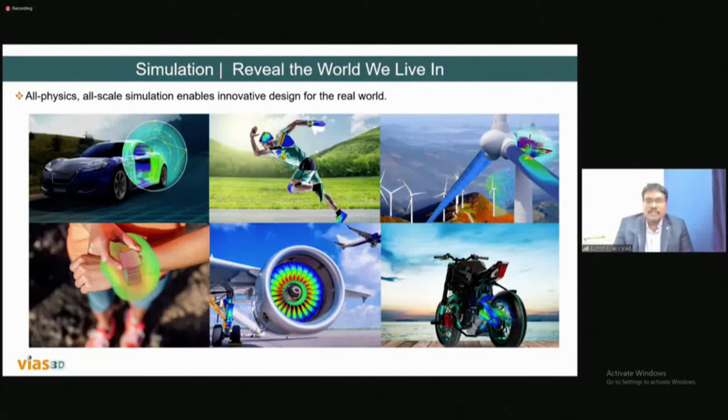When you come to electromagnetics, we will focus on 4 different aspects. One is the basic microwave and optical region, where a lot of players in India are working on antennas, antenna arrays for the base station as well as the receiver part, and also working on fiber material optical transmissions.

And again, as I mentioned before, PCB-based ECU boards are one of the most important things, but they are susceptible to a lot of emissions, radiations, and immunity problems.

That also we had to take care of. Now I can see that the switching networks, actuators, controllers - and you can see that all the industries are moving towards electric vehicles, electric motor design, which is also a complicated thing. But everything can be done by the simulation portfolio, all connected together.

So you get a system and assembly modeling where everything can be connected, and you can understand how the performance is happening. If the antenna is radiating, what fluctuations happen on the cable, because the cable also gets susceptible to external radiation - all that kind of analysis can be done in a single nutshell.

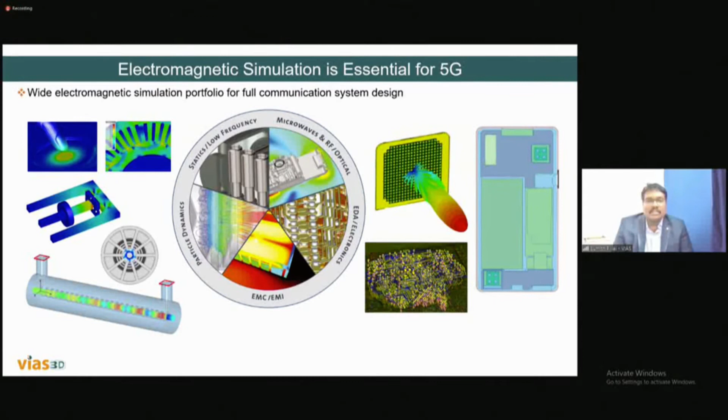Now you see the features about 5G - one of the things is it should have very good latency, and there should not be any delay in the response. You have to send a bulk amount of data that should not be delayed. Like Sir was presenting about virtual events where the singer can be in one place and the background in another place. So one of the things is no latency, the speed of transmission should have no delay, and you should be able to transmit a huge amount of data. So everything is important in terms of 5G.

Now these are the statistics we have seen from the past, forecasted a couple of years back, but now I think it is again improved - 25 billion is now maybe improved to 51. That forecast is already there. We have more than 50,000 technical papers on 5G already released or coming on the way, at least 30,000 already in the market, in different journals and conference papers.

Now one thing which also needs to be discussed is about the frequency bands, like Kiran sir was saying about the different frequency bands he is going to test. We will be interested in the sub-6 gigahertz frequency band as well as the millimeter wave frequency bands. I think, if I remember, SAMEER Chennai already has a test bed for the sub-6 gigahertz 5G test bed.

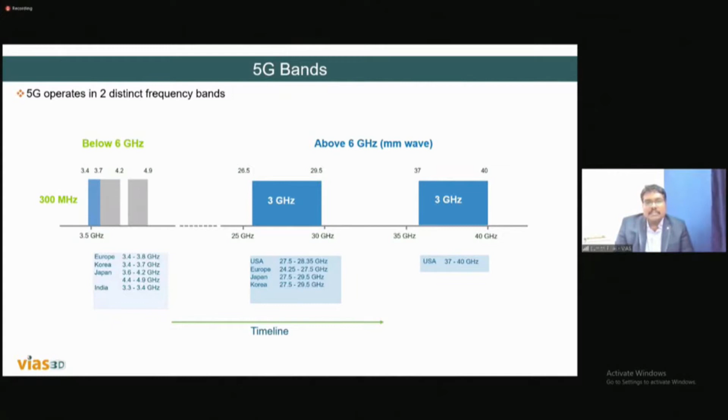So this development is also happening in India, not just for developing communication devices - they are also developing different kinds of test beds in incubators or IIT kind of prestigious organizations and institutions. Now, coming to the different challenges in the industry and how we can solve that.

One of the things is business challenges, obviously. Everybody has to adapt to 5G technology, they have to go hand in hand with the latest technology. Obviously it's not only 5G, any technology that is adopted in the industry very fast - it's very important how much they can adopt the latest technologies.

And how the complexity is varying - obviously 5G is a very complex technique, but as it is growing and more papers are coming, it will become easier to understand. But any technology, just like at the beginning, will be very much complicated.

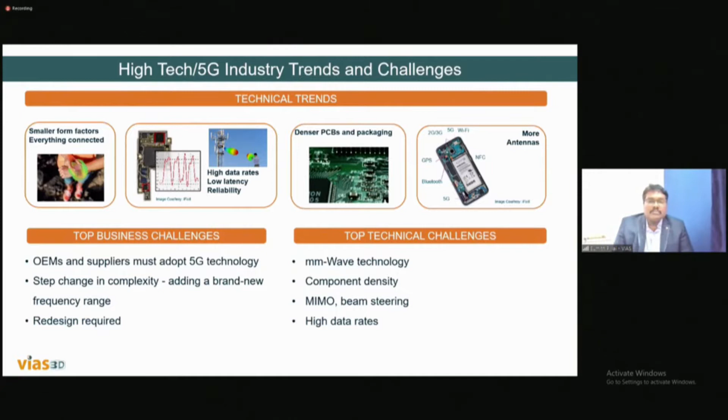Then there's redesign - obviously everything has to be redesigned in terms of the communication network and everything, as well as technical problems, since we are not that familiar with millimeter wave technology. But now it is included in the curriculum in some institutions, so new generation engineers may be much more familiar with millimeter wave technology and complex terms like phase division multiplexing and beam steering and everything.

Now it comes to the development of the product. Now you have to release the product in the market. So as I mentioned before, there has to be compliance. One is any device has to be compliant with the electromagnetic interference and compliant as per the IEC and other norms. And also if you consider the cables, you have to be compliant with the different kinds of CISPR standards.

Now, not only that, if you consider your phone, it is radiating. Your base station antenna, it is radiating. And one of the problems with 5G is the range; it is very difficult to establish very long range communication. So for that, you need to add more transceivers or routers, but that will add more complication, not only in terms of the implementation.

The other thing is how the safety of people can be affected, because generally we calculate the specific absorption rate for the human body for the antenna. Same way for the base station, our performance standard is the ICNIRP standard. So we have to get that compliance as well. So you have to see how much the particular transceivers are going to affect the human body. That is one of the challenges that also has to be seen.

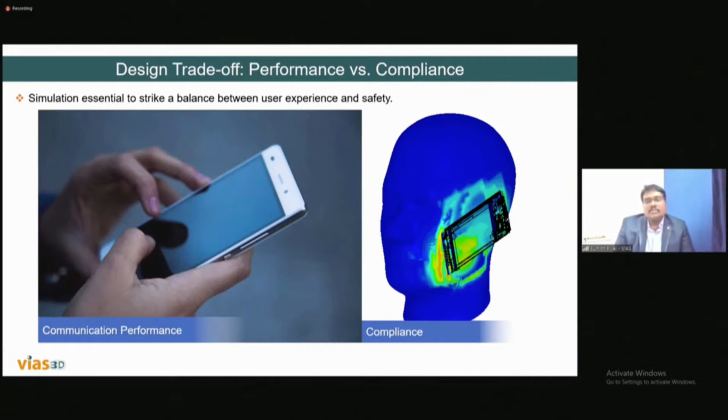So fortunately, simulation methods are also providing you accurate models, phantom models for the testing, because you know that physical testing is not always possible. Earlier, there was even animal testing, but now it is also restricted. Under certain cases, we can test animals as well. So it is a good thing that researchers are implementing phantom models, which are very accurate and very close to human or animal nature. So it will be easy for you to understand whether the device is going to be compliant or not compliant.

So we will be discussing three important industry verticals, and how 5G is going to be very important in those industries. For example, one is high tech, the other one is transportation mobility, and the third one is industrial equipment. For high tech, as I mentioned, most things are coming on the network side. They will be producing consumer electronics, or working on smart appliances, or some may be depending on wireless or wearable antenna networks, and it's also applicable for life science, because that is also one of the important beneficiaries of 5G.

So one important thing for us is how we are going to contribute from the electromagnetic point of view. We are going to help them with the analysis or development of millimeter wave antennas, or how they can integrate those antennas into their particular device, and make sure those antennas will not create a huge amount of radiation or affect other things, because generally any antenna is an intentional radiator, and there will also be an unintentional radiator, such as the cable. These radiations can affect the other ECUs as well, so ECU performance will reduce. So we have to find the best shielding method or best isolation method for this antenna. That is one of the things we work on along with the industries.

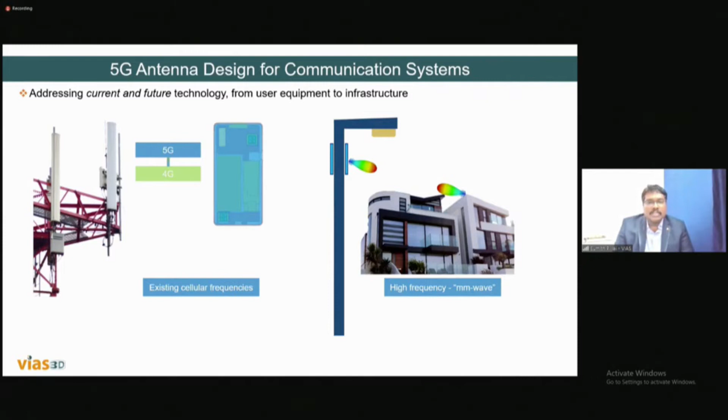So we are not only interested in the antenna design, but also, as I said, in what happens when you place the antenna on a particular device. As I mentioned, it may affect the devices there, so we have to find the best isolation for that particular antenna. The other thing is how that antenna is going to behave in that particular environment. For example, in a mobile phone case, how the radiation pattern is. Obviously, because of platform interference, there will be perturbations. Some perturbations are not acceptable; with some, we can pass the test. So we also have to take care of that.

So it will be different in terms of 5G in sub-6 GHz or in the millimeter wave, because in sub-6 GHz you already know that the density is more and the complication is more, because the element size is also large, and to allocate it within a smaller platform is very difficult. But on the other hand, in millimeter wave the element size is very small. But as I mentioned, we are considering an antenna array, not just one or two antennas.

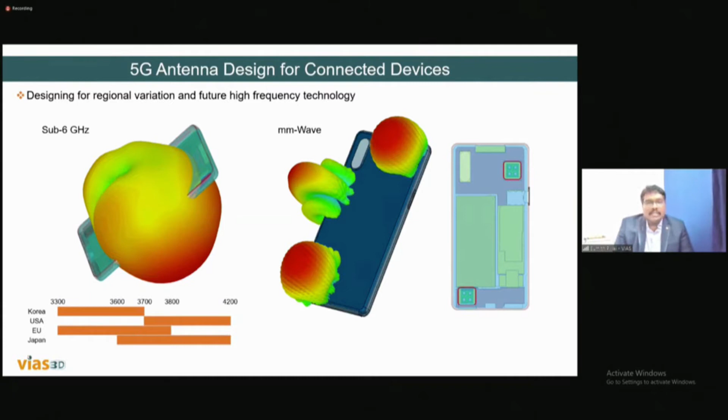When you are considering the MIMO architecture, the other thing is how you are going to place those elements on the particular platform. Obviously it will be very short in size. But the range, that is our concern, so that has to be improved.

The other part, as I already mentioned, is ECU development. ECU development is another key problem. So we need to smartly design the ECUs used for this 5G network. At the PCB level, we have to make it perfect so that it will not create much problem in the future. For example, whether the layout is going to work, or whether the traces have more cross coupling, all these things we have to test.

So signal integrity and power integrity analysis is one of the key analyses happening in the high-tech industries or 5G industries, to avoid further complications after fabrication or testing. So these kinds of methods we are also trying.

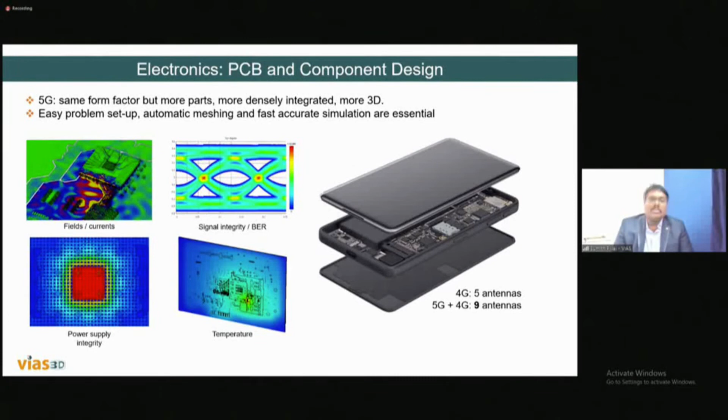And the other thing is temperature sensitivity, because all the integrated circuits we design are temperature sensitive. We have to find out how much heat is created by this particular PCB, and avoid the integrated circuit heating up other devices and causing a problem. So we have to find the solution and provide corresponding shielding or cooling mechanisms for that. And finally, after the PCB design, we go to physical testing.

But before the physical testing, we can do the same testing in the virtual platform as well. Not every software solution supports it; EMC is not that easily implementable in every software solution, but most commercial software is trying to adopt that kind of method. So now you can even go for EMC testing like radiated emission, conducted emission, or susceptibility tests. These are very important.

In 5G as well, there will be dedicated testing standards, and you have to test against them. Physical testing is always cost and time consuming, so you have to avoid multiple tests. So one of the best choices is to do the virtual testing and understand the possible chances of failure. Once you figure that out, you can make the solution in the software domain itself, and then go for the physical testing. Generally, you can reduce it to two or three tests. Sometimes you may pass in the first test, depending on the standard.

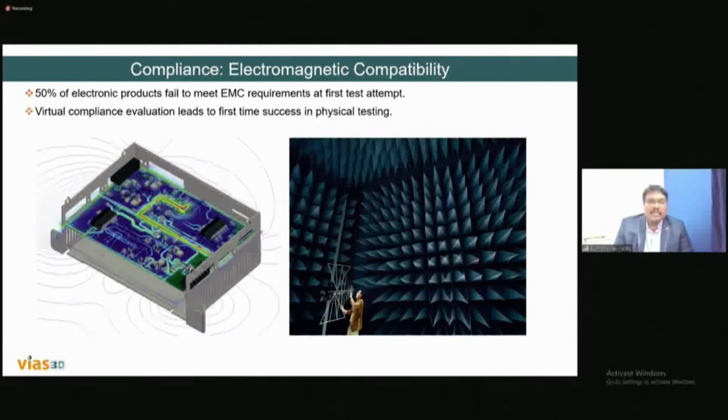After testing, once you say your device is capable of withstanding any kind of fluctuations and will work in the real environment, the other problem is how the base station and tower are to be implemented, because implementing the tower is more expensive than manufacturing the antenna, right? So you have to be very careful. That is where virtual platforms like software simulations help. You can virtually place the antennas on tower structures, and provide electrical tilt and mechanical tilt as per convenience.

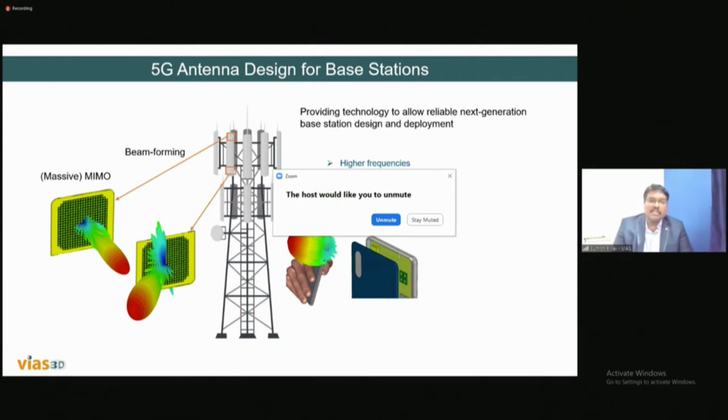You can check that. You can place one or two antennas or antenna arrays, then see the possible coverage. You can complete the propagation mapping and finalize that for this tower I need this antenna in this direction with this electrical and this mechanical tilt. That is going to save a lot of time when you go for the actual implementation.

And one more thing, you have to go for compliance as well. You have to test this particular base station antenna by placing a human phantom.

Okay, how much is that base station going to influence the human body, or how much radiation is going to be absorbed by the human body. In this regard, the SAR standards are very much important, and for millimeter wave those standards will definitely need to be there, because the penetration will be less, but the power flow will have to be seen. So we also tested similar kinds of cases, and we have seen that the penetration is very less, but the power flow is actually happening throughout the body.

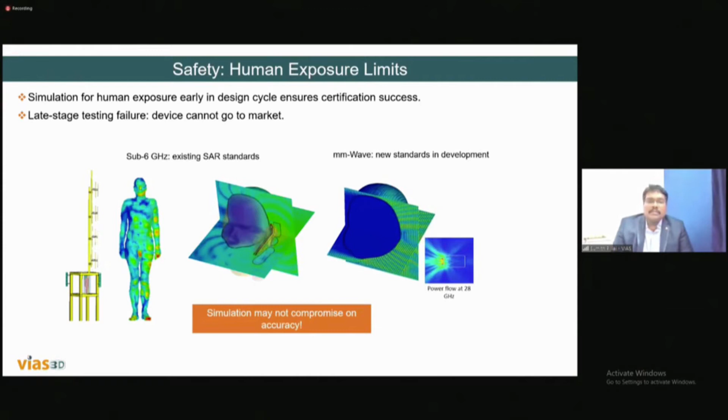So that is also one of the things, and the new standards. So we are waiting for the new standards as well from the industry verticals, which they didn't provide yet, but very soon I hope the new standards are going to be in place, and we're going to test it.

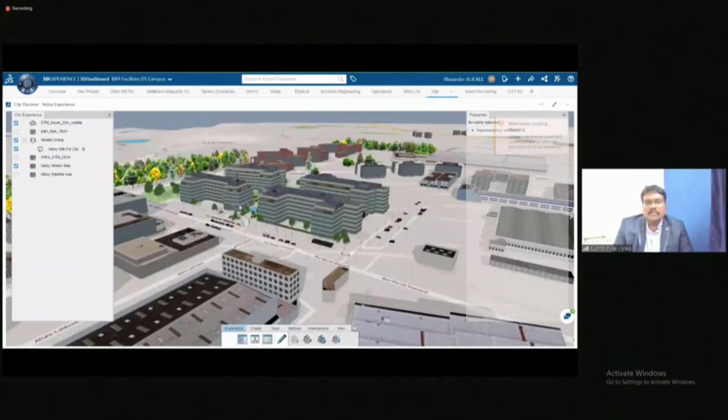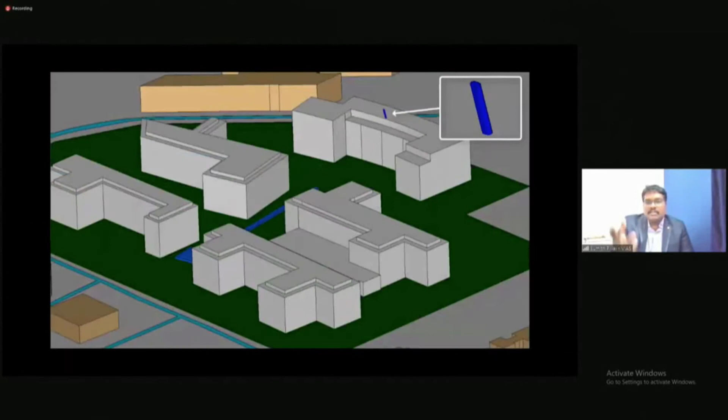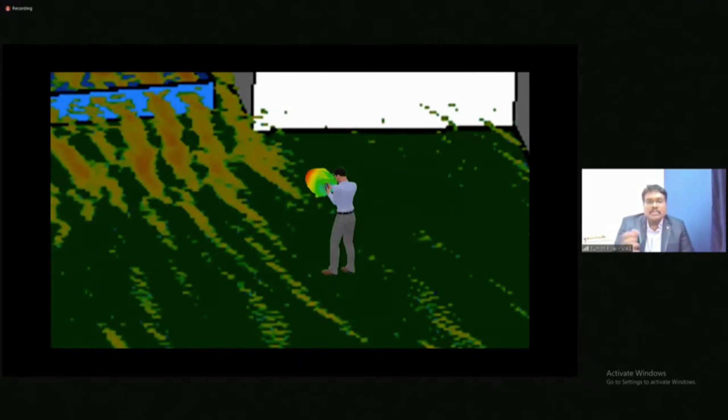And this is an example of what we generally do for the industries, basically for propagation model mapping, etc. So we have our 3D Experience platform where we can construct entire smart city kinds of structures. And you can place your base station on the location, just like you can see the base station is placed over there. When that radiation is happening, you can see how that radiation is actually spreading across that particular area. And suppose your person is over there with a mobile phone, depending on the mobile phone sensitivity, antenna sensitivity, how much you can receive from that particular base station.

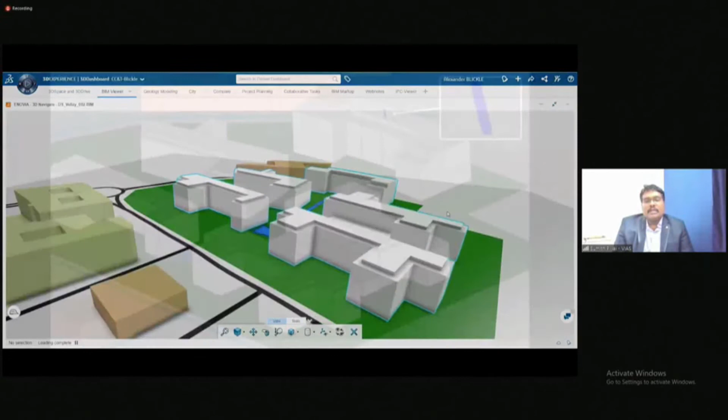So there are a lot of challenges. Obviously the multipath propagation is one of the things. The vegetation is also going to contribute. What is missing is obviously the atmospheric effect, but we can include it ourselves as losses. Definitely the 3GPP standard equations will be in place, so we can add those equations as well. We can make it more finalized as per the 3GPP standard.

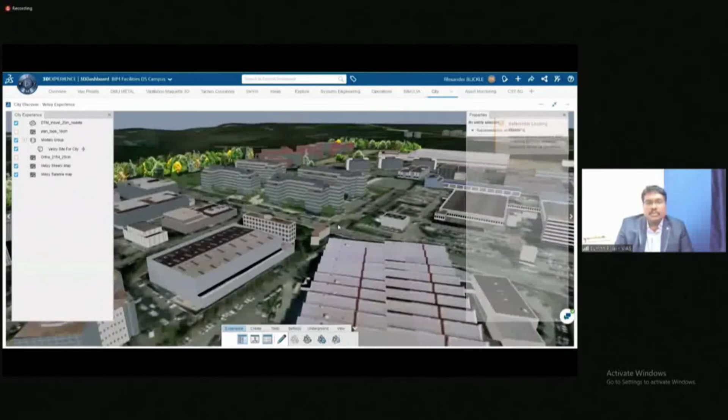Basically, this is one of the important projects we do nowadays, because most of the industries are interested to see how their base station is going to work, how efficiently it can propagate over the media. The other thing is we also do some analysis for reliability and resilience as well. For example, the building, you have a base station antenna.

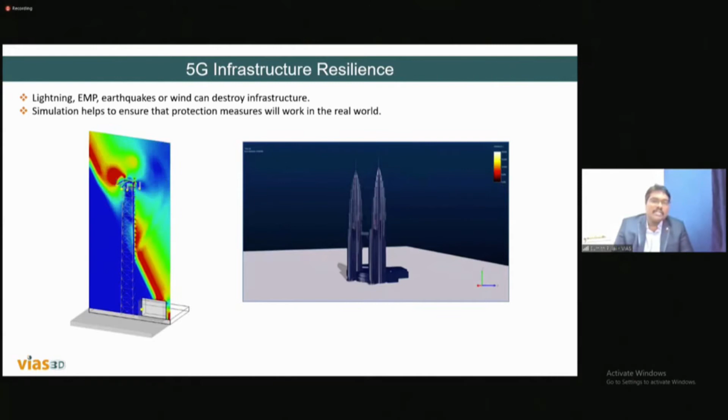If a thunder strike or lightning strike is happening, how much is it going to affect it, the entire metallic structure is going to resonate according to that frequency. So it will also create a huge amount of current flow. It can damage the 5G system. So we have to see what the possible effect is. We have to provide the appropriate lightning arresters for that.

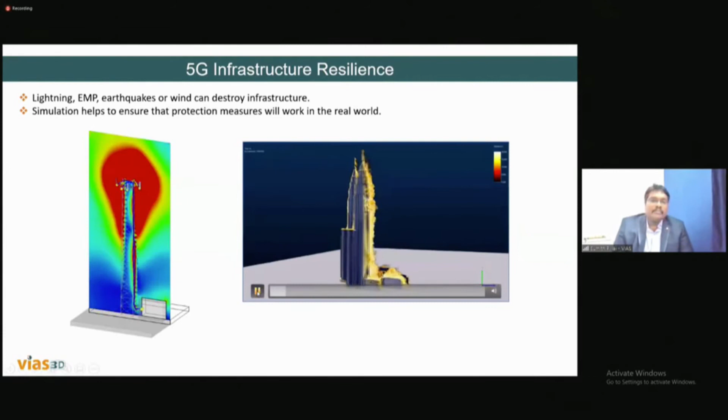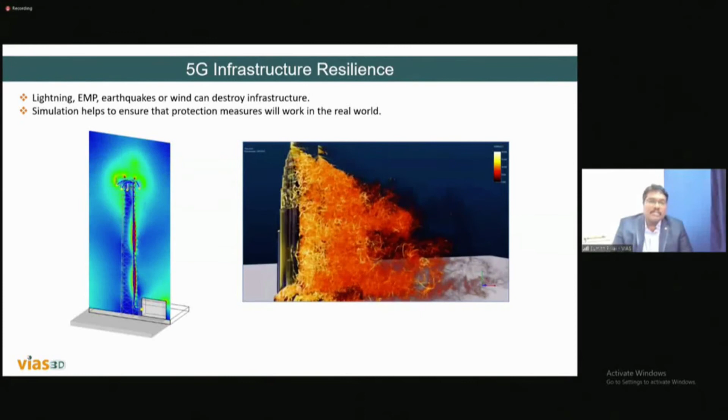And also, as you can see, we can even do the other mechanical aspects. If there is wind flowing, or if there is any earthquake, how much it is going to affect the 5G product. So all this is not completely electromagnetic, but there is a mechanical simulation as well. So it is a complete simulation methodology.

So I'm going to be finishing very soon. We have to talk something about transportation mobility, obviously for the automotive industries. That is one of the major beneficiaries of 5G communication. And nowadays, everybody is interested in advanced driver assistance systems and vehicle communication, obviously the smart vehicle. So what are the challenges going to be faced when you create the most smart vehicle like Tesla? They are doing a lot of experiments. Apple, they are doing experiments.

Obviously, we have to see how the communication devices are working, because there will be so many antennas, so many communication protocols implemented for the vehicle. So even after accidents, how they are working, how reliable the vehicle equipment and these electronic modules are. That also has to be done. That is the mechanical aspects and electrical aspects.

All these communication antennas will be placed in a small area. So you have to keep them isolated so that the cross coupling, or co-site interference, is minimized. RF interference should be minimized, and also your cables should be protected from this radiation, because it will be an electric vehicle. Obviously, for the electric vehicle, the performance is one of the important things, depending on the cables and how they are protected.

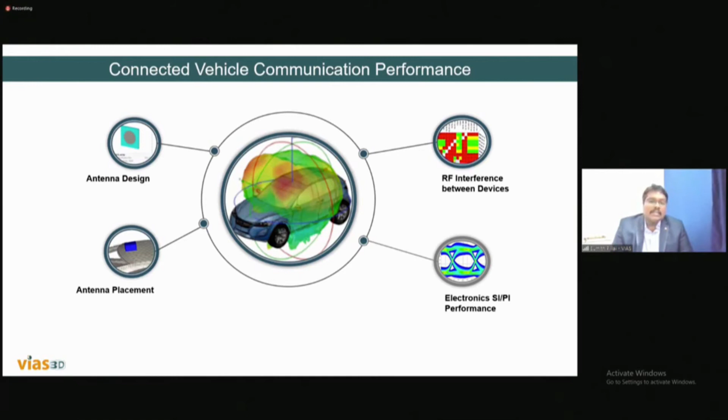So these are one of the bigger challenges in the automotive industry. We have a lot of customers working on these particular aspects: antenna design and placement. Obviously, with the ADAS 77.5 gigahertz radar, they are testing how it performs and how accurately it can work. And the presence of ghost signals, they are experimenting with that. So many things are coming.

Similarly for smart manufacturing in the industrial equipment scenario, smart sensors are interconnected with antennas. We have already seen that automotive robots are doing most of the work. But how that performance can be improved using 5G is one example. It's coming from Ericsson and Fraunhofer. They predicted that around 360 million euros can be saved annually in bladed disc manufacturing for aerospace engines, where highly accurate and precise manufacturing is required.

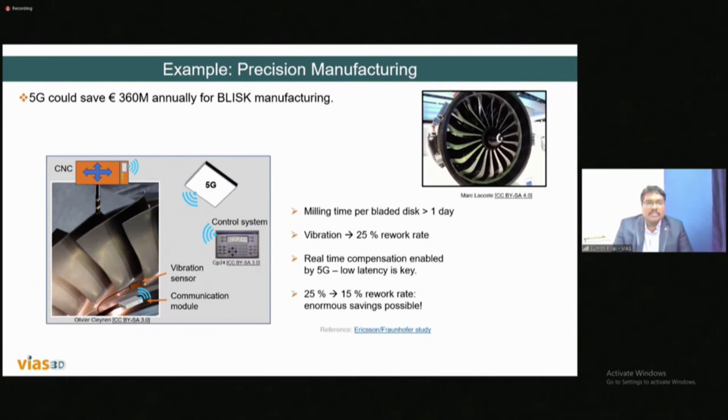So we can place vibration sensors along with the 5G communication device. You can monitor how the vibration is affecting it, make it more and more reliable, and understand what challenges are going to happen and how they could create problems. This is one of the most important things, and it is the prediction from Ericsson. And the other case is how.

Sumit, just in the interest of time, how much more do you have? Yeah, it is going to finish very soon.

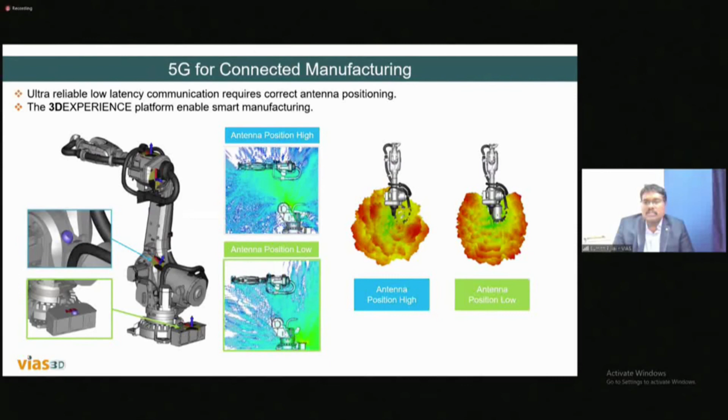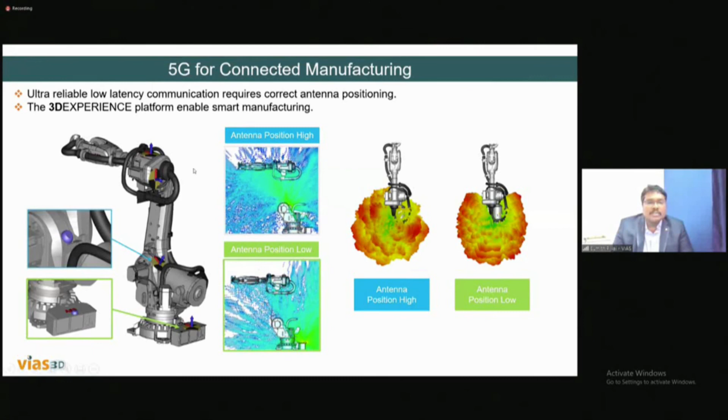Okay, all right. The similar thing is in smart manufacturing as well. We can place a robot here and two antennas there, and check the visibility of each antenna, because it is important how many antennas are required to control these kinds of devices. So this is also one aspect of simulation.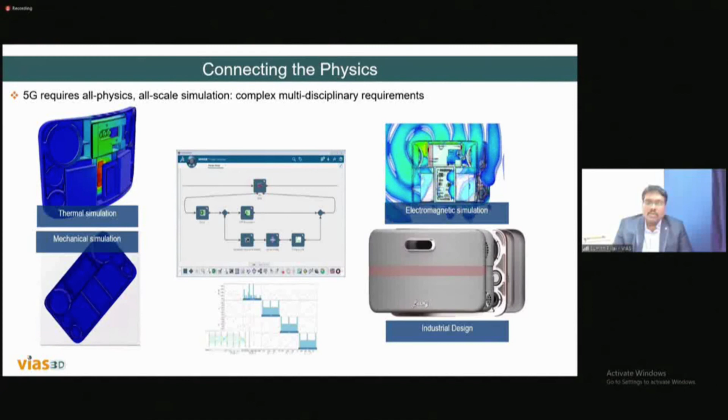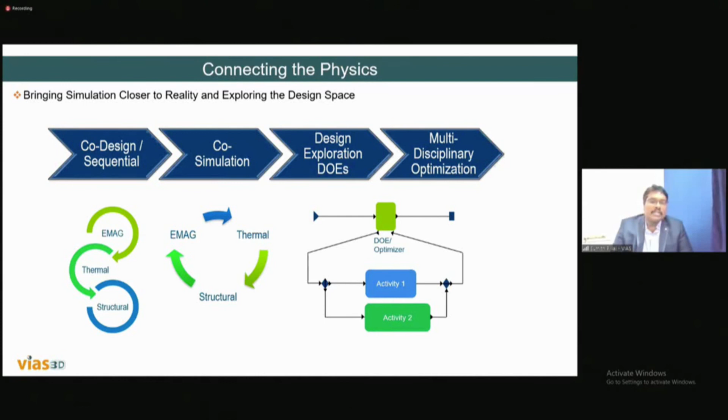So to conclude, I discussed mostly the electromagnetic side, but it is a combination of thermal, mechanical, and industrial design as well. It is all related. All devices will have temperature problems, and temperature can create mechanical structural problems, which again go back to electromagnetic performance. So all these things come into a single nutshell that industries have to take care of. What we are interested in is electromagnetic, thermal and structural simulations, all hand in hand. EMC performance can be affected by thermal and structural factors.

So there are many projects we are taking care of, and we are developing more and more in our 3DEXPERIENCE platform to give confidence to industries to accelerate growth in their product manufacturing. We only discussed high tech and transportation and mobility in a short time, but there are many other areas, like life sciences, that benefit from simulations.